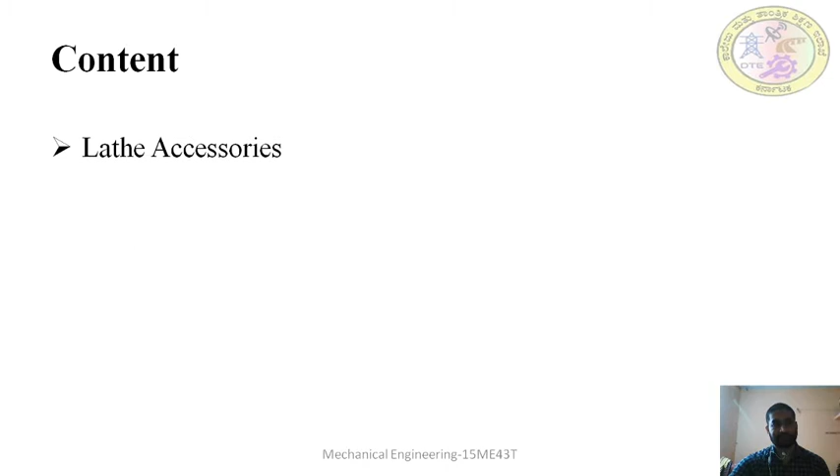In today's session, we are discussing the following content: lathe accessories, all about lathe accessories.

Lathe accessories, as discussed in the last class, are used for holding the workpiece, or they may be used for holding the tool for specific use. We cannot hold all workpieces using live center or dead center, since some applications or workpieces require complicated setups. For holding such workpieces and specific purpose work, we use these accessories.

What are those accessories? You can see the centers, which we have already discussed in the last class: live center, dead center, pipe centers, tipped center, frictionless center, half centers, etc. In today's class, we are discussing chucks and face plates.

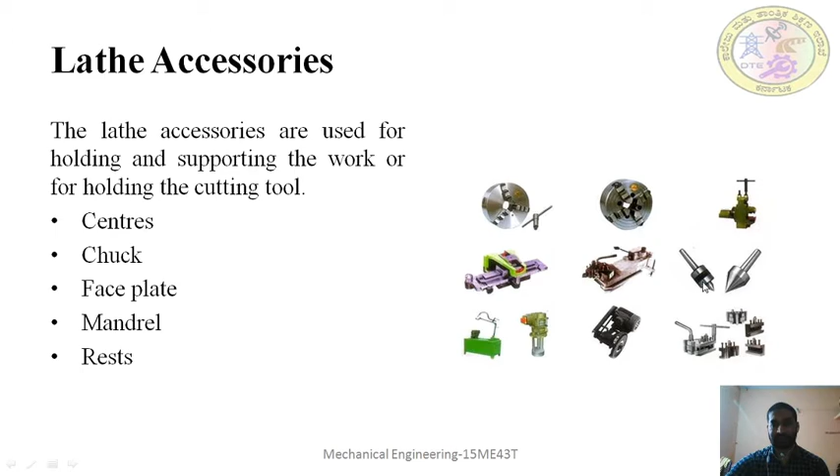You can see the chucks here, and these are the centers. So today we are discussing chucks. A chuck is a special type of clamp used to hold the workpiece.

The chuck is mounted on the spindle which rotates within the headstock. It is mounted on the headstock side, on the spindle of the headstock. As the spindle rotates, the chuck also rotates.

There are different types of chucks which we will study one by one: 3 jaw chuck, 4 jaw chuck, collet chuck, spindle chuck, magnetic chuck, combination chuck, and air operated chucks.

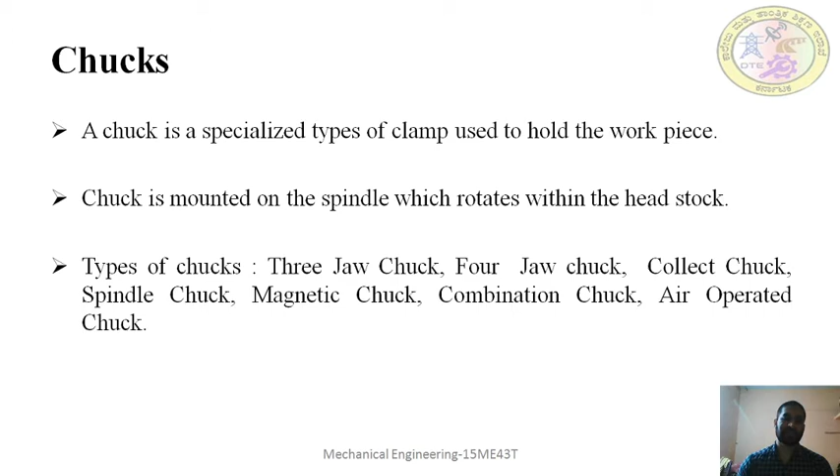The 3 jaw chuck, as you can see in the figure, is called so because it has 3 jaws. These jaws are fitted in slots made to slide at the same time by an equal amount by rotating one of the 3 pinions of the chuck.

This 3 jaw chuck has 3 jaws at an angle of 120 degrees each, since 360 divided by 3 jaws is 120. So the angle between the jaws is 120 degrees. There are 3 slots, and on these slots the jaws move forward or backward by an equal amount.

All 3 jaws move by an equal amount. It has 3 scroll discs, and if you rotate any one of the scroll discs with a chuck key, all 3 jaws move by an equal amount. This arrangement is made inside the chuck.

That's why it is called a universal chuck. Universal means all jaws slide by an equal amount when you rotate any one of the scrolls using the chuck key, making it suitable for holding a regular workpiece, whether cylindrical or hexagonal. So the chuck is suitable for holding round, hexagonal, and other similar shaped workpieces.

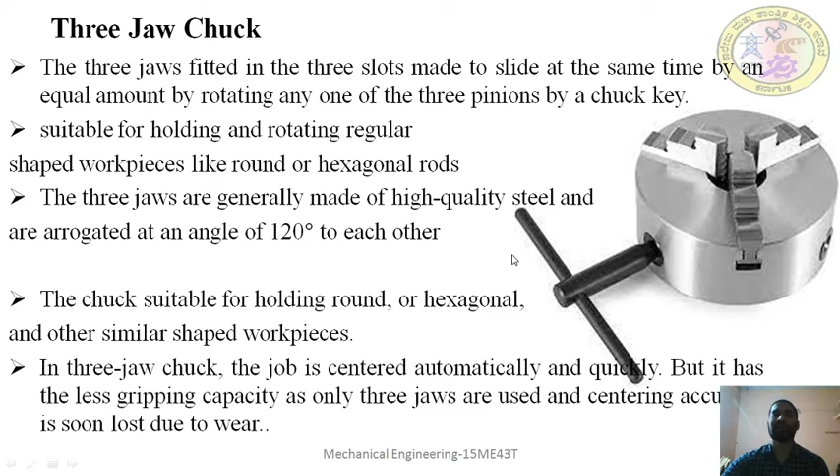Next is the 4-jaw chuck. You can see it has 4 jaws at an angle of 360 divided by 4, that is 90 degrees to each other. So the 4 jaws are made to slide in the slot, and 4 slots are made at an angle of 90 degrees to each other.

Here all the jaws are moved independently. It is not moved simultaneously as compared to the 3-jaw chuck. That's why it is called the 4-jaw independent chuck. Why is it independent? Because all the jaws are moved independently, not simultaneously.

The particular jaw may be moved according to the shape of the work. So it can be used for any complicated shape of the workpiece. It cannot be used only for cylindrical or hexagon shapes; it can also be used for holding square shaped or irregular shaped workpieces, so that we can move each jaw according to the shape of the workpiece independently.

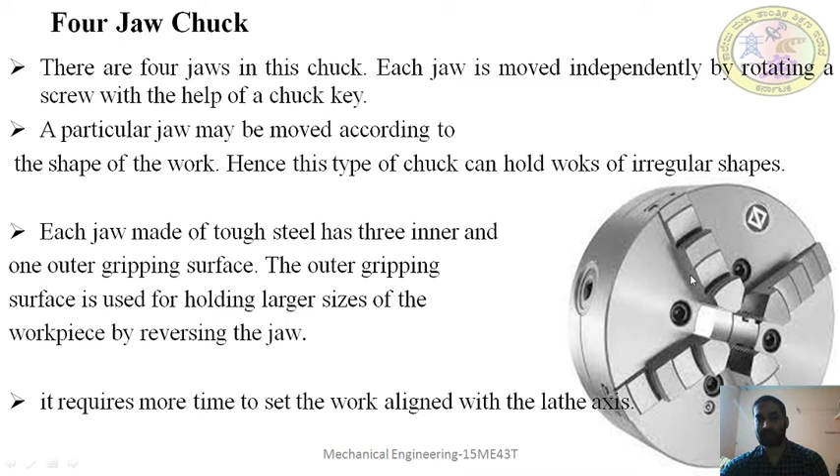Next, we'll study the difference between the 3-jaw and 4-jaw chuck. In the 3-jaw chuck, the jaws move at an equal time, meaning all the jaws move by equal time. When you rotate one of the small discs, all 3 jaws move at an equal time. Whereas in the 4-jaw chuck, the jaws are moved separately, that is independently. If you want to move a particular jaw, you have to rotate the small disc of that particular jaw.

The depth of cut is relatively less in the case of the 3-jaw chuck, as the gripping surface is having only 3 jaws, we cannot give more depth of cut. In the 4-jaw chuck, a higher depth of cut can be produced because it has 4 jaws, so the gripping capacity is higher. The 3-jaw chuck has one hole for a chuck key to tighten or loosen the jaw grip, while the 4-jaw chuck has 4 separate holes for the 4 jaws.

In the 3-jaw chuck, the workpieces cannot be set for eccentric turning. So for components having irregular shapes, you cannot hold them in the 3-jaw chuck, whereas in the 4-jaw chuck you can hold any type of irregular shape. In the 3-jaw chuck, centering accuracy is lower. In the 4-jaw chuck, since we have to make the centering manually, the centering accuracy is higher because we can make our own centering with the highest accuracy.

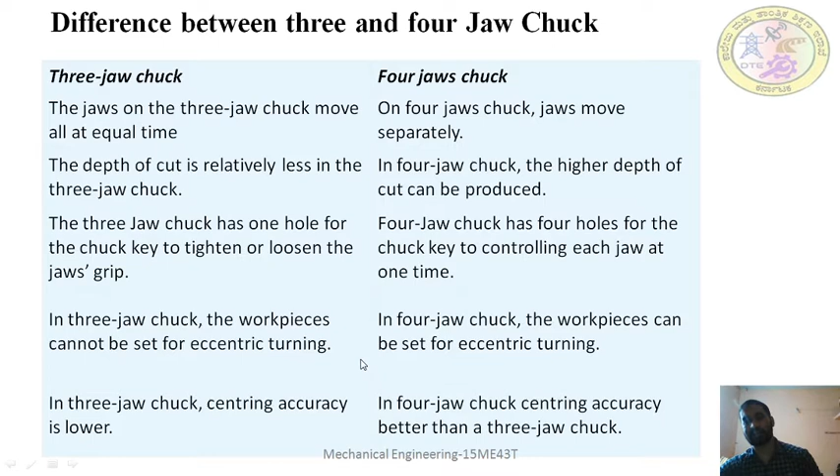Combination chuck, as the name itself tells, is a combination chuck. It is a combination of the 3-jaw universal chuck and the 4-jaw independent chuck.

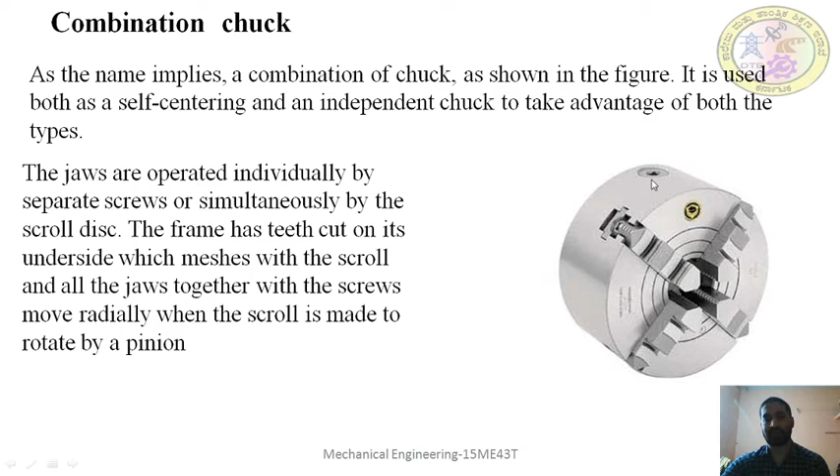If you want to move each jaw separately, there are separate holes for each of the 4 jaws. If you want to move all 4 jaws simultaneously, just like the 3-jaw universal chuck, there is a scroll disc. Moving the scroll disc moves all 4 jaws simultaneously, just like the 3-jaw self-centering chuck. So it has the advantages of both the 4-jaw independent chuck and the 3-jaw self-centering chuck: you can move all jaws independently using separate holes, or move them all simultaneously using the single scroll disc.

Next is the magnetic chuck. Here permanent magnets are used. This chuck is used for holding very thin workpieces, material which cannot be held in other types of chuck like the 3-jaw or 4-jaw independent chuck. We cannot hold very thin workpieces in those chucks; if you hold such a thin component in them, it will get destroyed or distorted.

To avoid that, we use a magnetic chuck to hold very thin workpieces made of magnetic metal. The only thing is you cannot machine all kinds of materials in a magnetic chuck - you can only hold workpieces having magnetic properties, components made of magnetic material like iron or steel - that is, ferrous metals and ferrous alloys can be held in this kind of chuck.

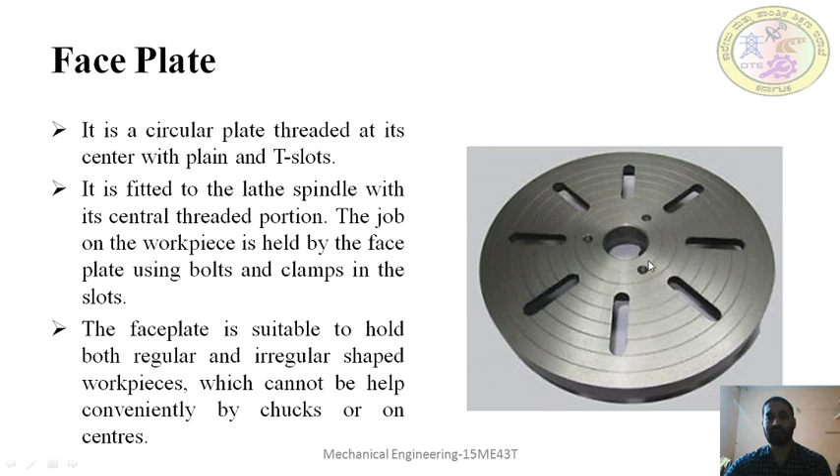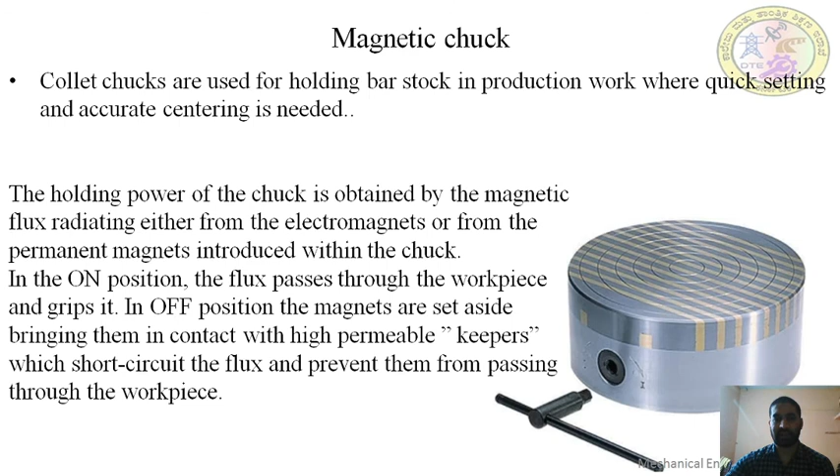So, before finishing this session, we will just watch how these magnetic chucks are used. We have a small video.

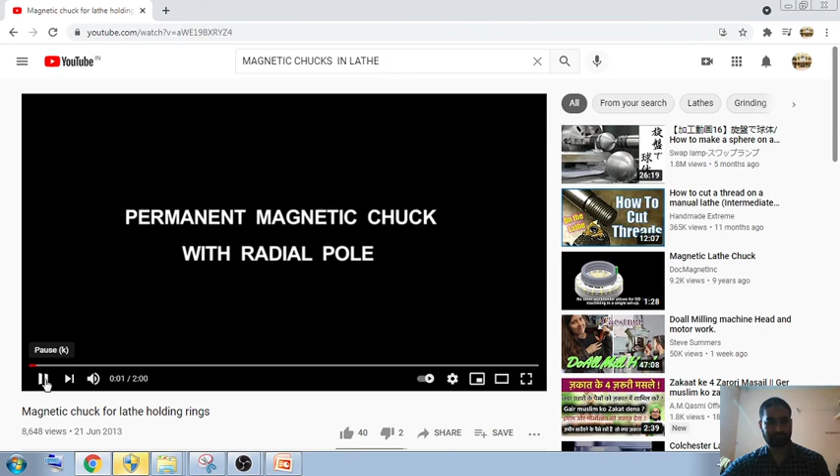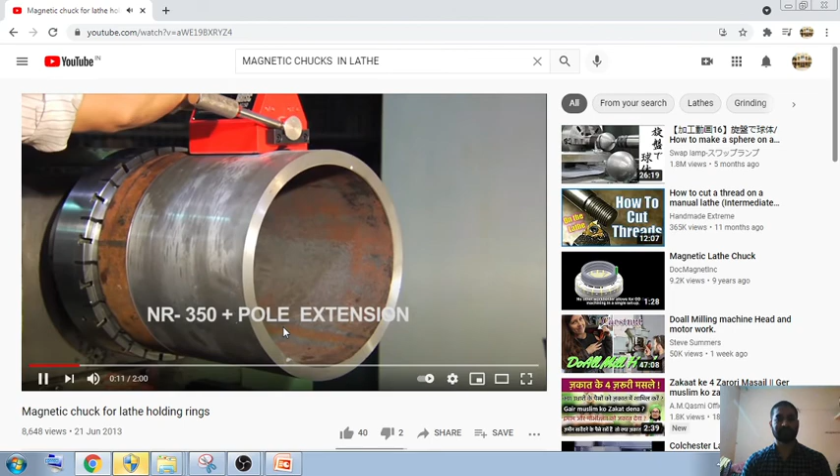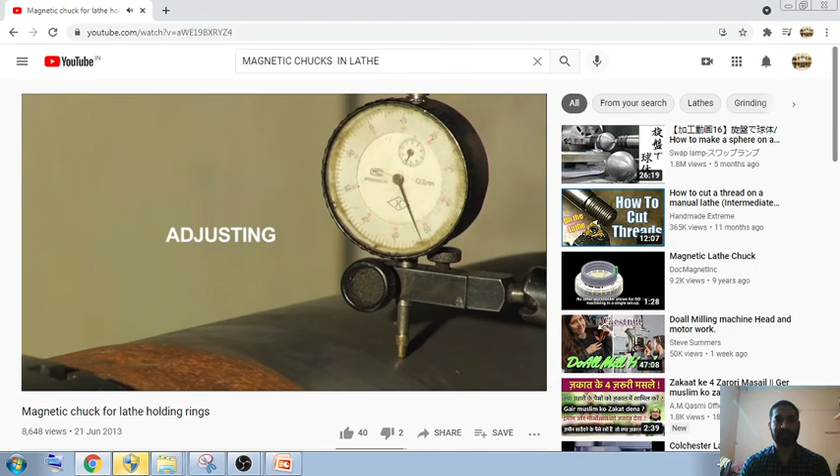This is the magnetic chuck you can see here, and this is the component. It is turning on. This is the setting of the job, continuing.